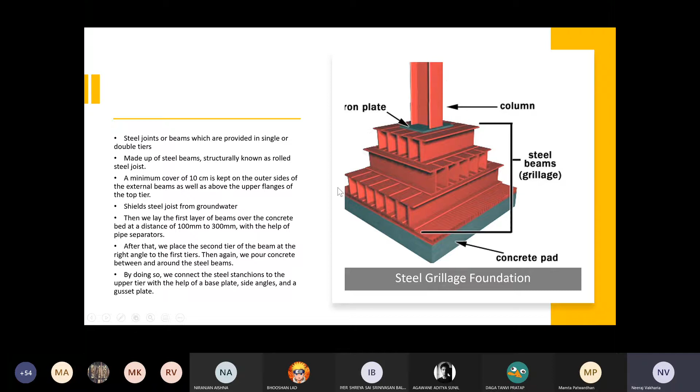There are a few advantages. First of all, the installation process is easy and fast compared to RCC. The steel used in steel grillage foundation can be reused several times, making it environment friendly. Of course, it won't be reusable for the foundation again, but the steel itself can be used later for other purposes. The technology and material used in installation and manufacturing are simple and readily available.

And customization can happen according to project requirement, size and different applications.

It assists in reducing the vibration of the house if it's near a highway or railway line. It's not rigid, so some flexibility reduces the vibration which comes to the building. It's suitable for low soil bearing capacity as well. And the foundation reduces the heat of the home; the heat which it can transfer can be reduced. Now it can be an advantage, it can be a disadvantage.

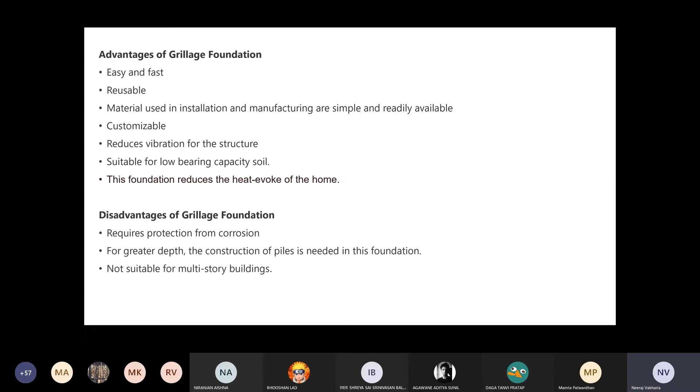In general, steel frame structure construction has four procedures. First is construction of the steel frame structure foundation, then steel column construction over the foundation, then erection of steel beams connecting to the columns, and then the floor systems used in steel frame construction. Since we are looking at the foundation, I have two reference videos which we'll see in some time.

Generally the type of foundation required for a given structure is based on soil bearing capacity, as we all know. Soil investigation, including surface and subsurface exploration, is used to assess the condition of the soil on which the steel frame structure rests. We create test pits, take soil samples, analyze the minerals, water, humidity and everything, and then we decide.

For example, when moderate to low loads are imposed, it is advisable to use an RCC bearing pad or strip foundation, and what that is, we'll see in this first video. These foundation types transfer load to soil capable of supporting the transferred loads.

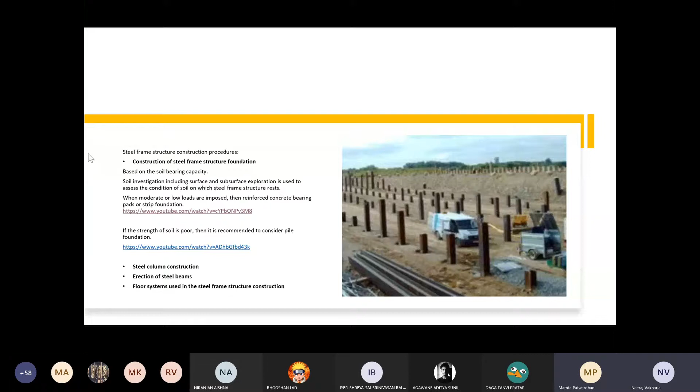Let me just open the link. I have to reshare the screen, just a second. You can post the link on chat also, Neeraj. Yeah, sure, because then it won't lag. Everyone can watch it. Primarily with modular sketching you get less marks, but this time you have to go hand sketching. That's the first link. You want us to watch it right now? I'll play it. Guys, I hope you can see the screen. Is there sound? No, I've kept it mute because it might lag.

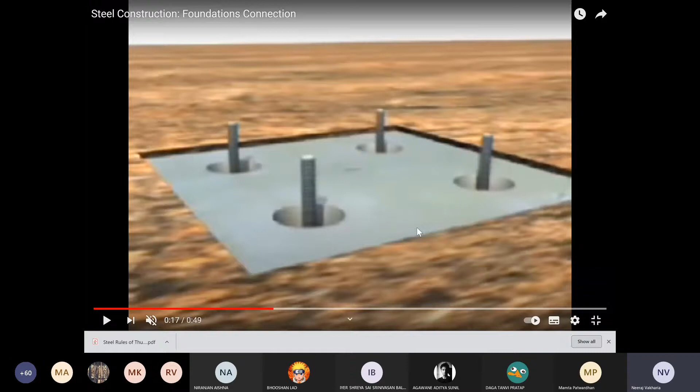Here, as you can see, below the steel structure there is an excavation pit; it's not shown here. We provide a concrete pad below. Over it, we temporarily hang these anchor bolts, then we concrete it and take it up. As I said, steel foundation is not generally used. We use concrete foundation, RCC foundation, take it above the ground and then connect steel columns to it. Here you can see there are 4 anchor bolts.

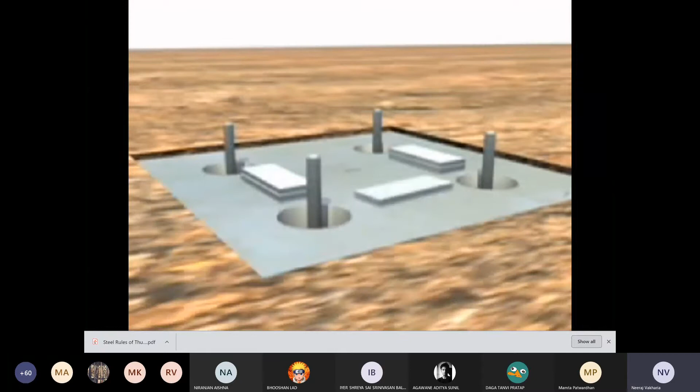There is a concrete pedestal, and these small steel plates are used to level it properly to the exact height required from all sides. It shouldn't be tilted. Then the steel column with the base plate is rested over these bolts. Then we bolt it and make it rigid. Then we pour grouting: the space between the base plate and the concrete pedestal, we fill it up with grouting. It basically makes it solid.

Was there a lag, guys? I didn't get it if some of you couldn't reply. Not really, not really.

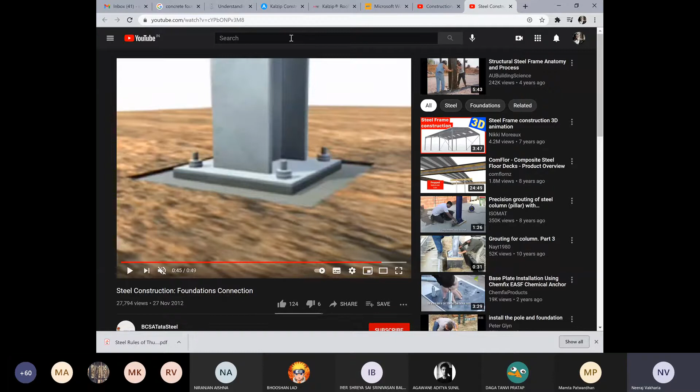Okay, great. So this is how the shallow foundation happens. Grouting is basically the filler material. In general terms, grouting is used whenever we fill up gaps or joints. It may also be used for the tiles we lay in our houses, or in conditions like this, since there was a space and we had to cover it up. So it's a liquid which becomes solid after a time.

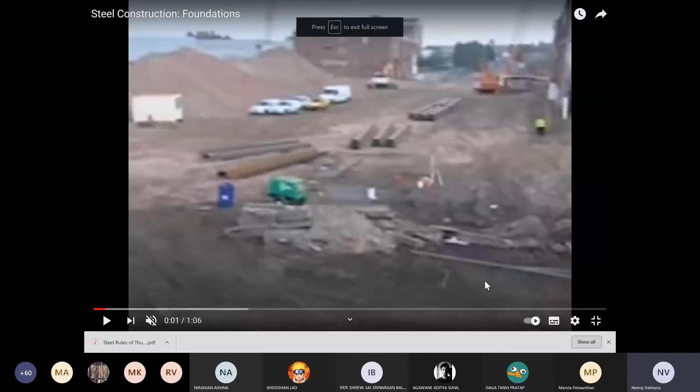Again, the material for grouting can differ based on application. Here, the grouting we use for our houses for tiles is basically cement. But for this kind of construction, they are complex chemicals which harden after it solidifies.

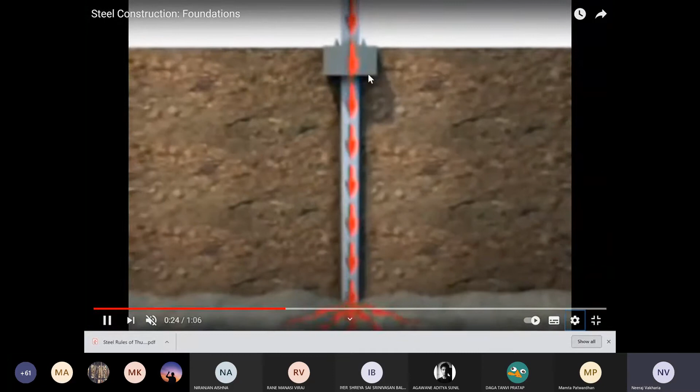So here again, we are creating a pit. Depending on the hard strata we might get, we either insert a pile, as you can see in the image, we insert a steel pile and then create concrete padding at the top. This is how we hammer down steel piles. You know about concrete piles from previous year, but this is steel pile. Again, the procedure is the same on the concrete padding. We then grout it, we bolt it, and then it's ready.

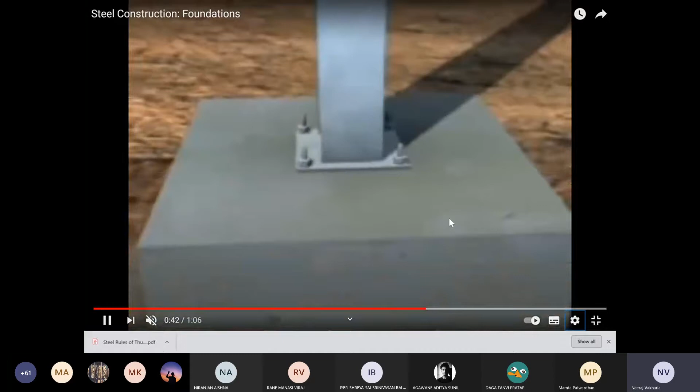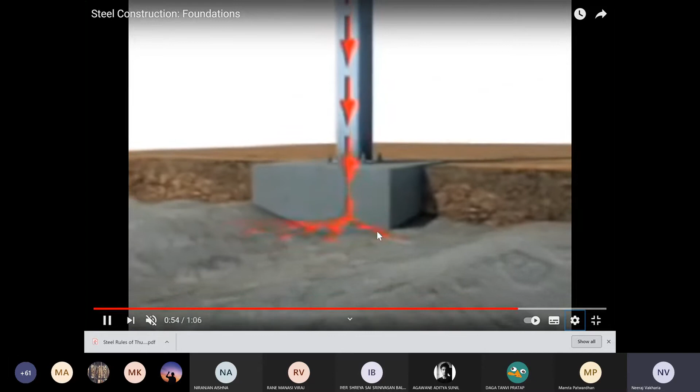So if it's going to be a shallow foundation, then just this could be the condition. But if it's a deep foundation, then the piles need to be inserted, as you saw in the previous video. It's just a very basic animation video.

See, here you can see properly. This is the steel pile. We don't usually prefer steel piles because they can corrode. But here with steel piles, there are 4 anchor bolts, then we concretize it. This, on railway stations, you all must have seen, where the bolts are taken out of the ground.

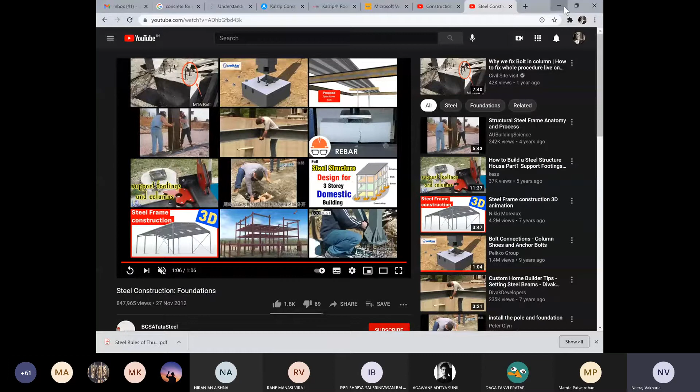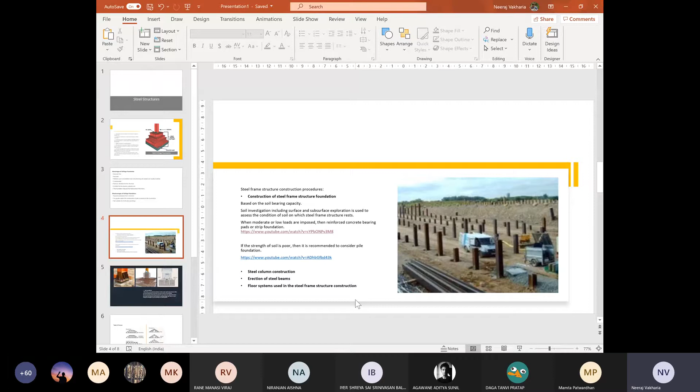Generally, even with the bolting that happens, we don't let it go below the ground level. We take it a bit above, and on railway stations, if you must have seen, they create sitting around it by creating one more concrete padding over it. So yeah, that's the basic.

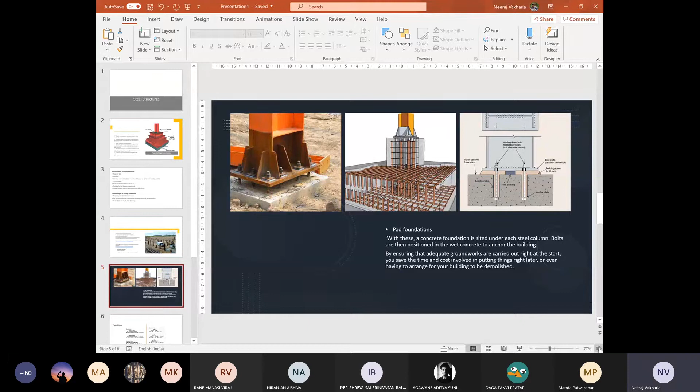See, this is the actual site image. If you can see, uh, just a second.

So here, as you can see, the concrete foundation has been created, and above that, there are 4 bolts, or 8, or however many may be required. This is how we construct it a bit above the ground and not below, so that the joinery and everything is not connected to the soil, which may or may not receive water or humidity, and we can save it from that.

So this space, the gap, is large as of now, but then we grout it and fill it up. Okay, so it becomes solid.

So the most common type of foundation for steel frame structures is the pad foundation, basically what you see in the middle image. With these, a concrete foundation is sited under each steel column. Bolts are positioned in the wet concrete to anchor the building by ensuring adequate groundworks are carried out, to save time and cost.

This yellow thing, or light orange thing, which you see is grouting, basically the bedding space. The steel packing is used for leveling, as you saw those plates which we kept. So yeah, that's pretty much it.

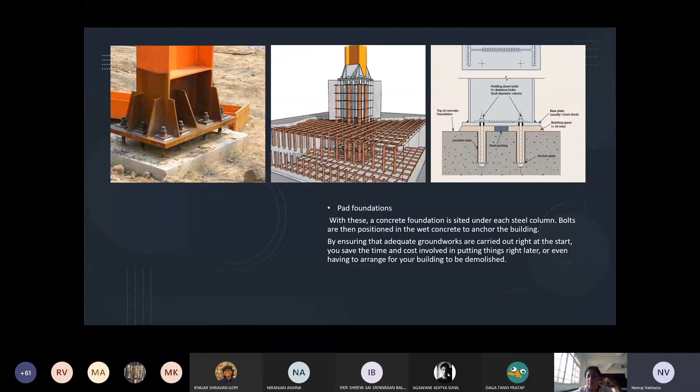Is that it, guys? Now I just have a few random slides based on the questions I've been getting for your IDS project about steel members and steel structural elements. I'm just going to go through a few of them. I wasn't able to make more slides, but one of the first things is, see,

the truss - when we say we are using steel roof or steel trusses, it's not always pitched, the triangular truss in steel. It can be any of these, and there are more customized trusses as well. If the project is huge with multiple modules, then the truss can also be created, built with the existing sections which we have. Here you can see a few images I've kept.

Mostly for structures extending - generally what we use for large spans, maybe halls or railway stations, we use Warren or Pratt truss, which are parallel chord trusses. They are parallel, not triangular. These parallel trusses we use generally up to a span of 35 to 40 meters. They are very thin. You don't have to every time create a triangular truss - that's not the limitation, you can do anything. Just keep that in mind.

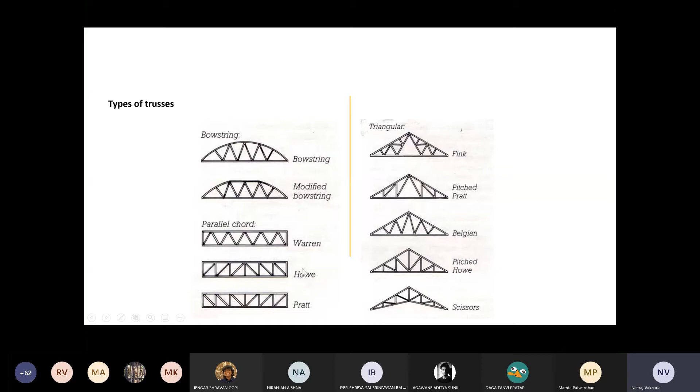Then, composite floor slab. Many of you are asking how the slab is constructed - steel slab is constructed in steel structures. So that again is a small video I'll be playing. Just give me a second.

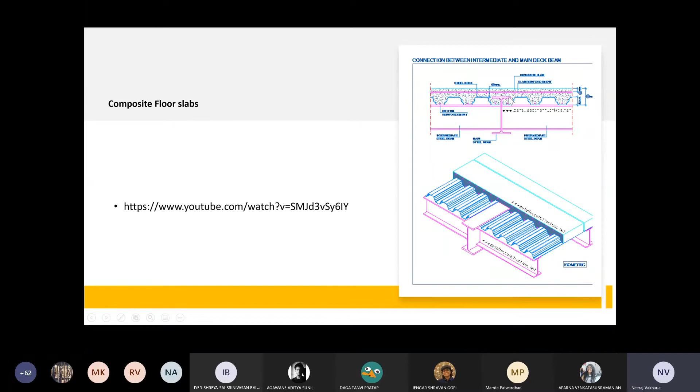But it's not like what we use for temporary shading. It's expensive, it's better.

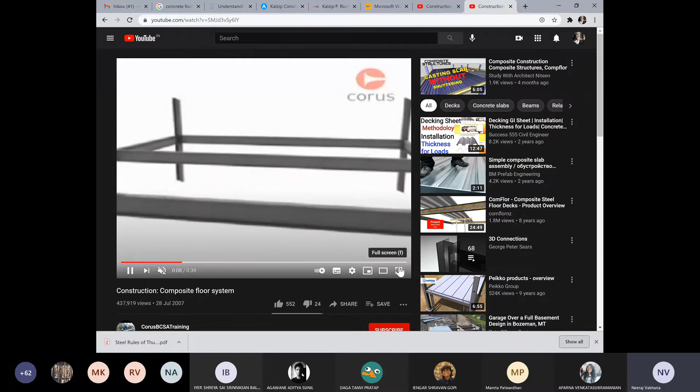As you can see in the video, this beam, over that we provide metal decking. Then you can see the video, right?

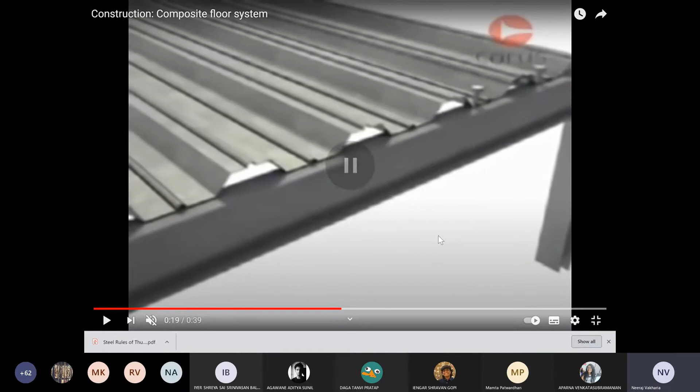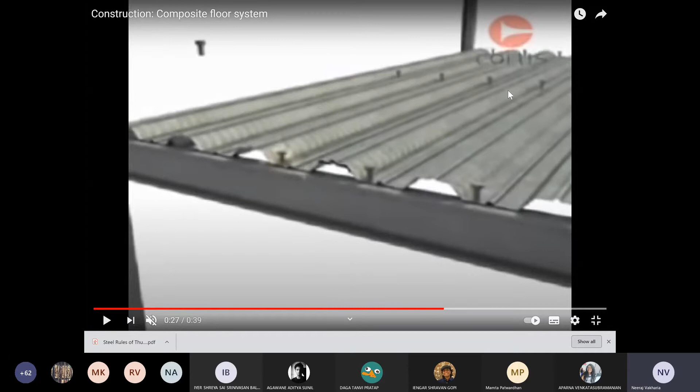Yes, okay. As you can see, it is bolted with the I-section below, so it's fixed at intervals. As the span might be large, then here again we might give one more I-beam, and over that we again fix it.

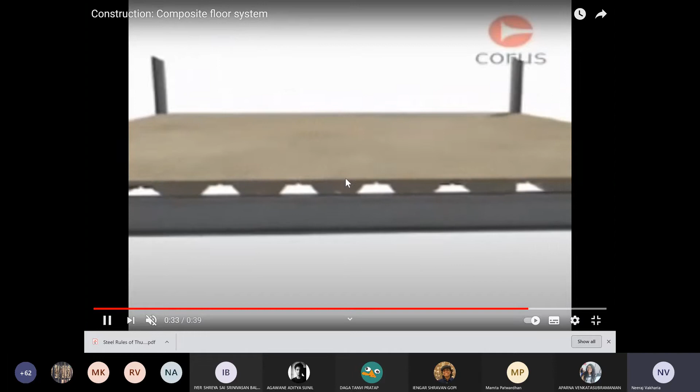Then we provide reinforcement if required - generally basic at least. And then we cover it up with concrete, and that's how these slabs are created. So that's basically metal decking, and that's how this composite floor slab works.

Someone is asking a question: does the depth of foundation vary if comparing RCC foundation and steel foundation, like for tender? Yeah, it will vary according to the material. The depth of foundation may depend on a few other aspects as well, but if we compare RCC foundation and steel foundation, yes, it does vary.

So is it like steel foundation requires less depth? Steel requires less depth because its capacity to bear the soil pressure is better. I mean, it's this area. Okay, so it does vary. So this is about the composite.

We don't call it steel slabs because we are using concrete RCC, I mean concrete and steel decking. So it's composite floor slab.

The last thing I want to tell you, this might be important for all of you for your IDS project. This is for the structural steel member - these are thumb rules which can be used for sizes, just to give you an idea so that you can visualize in your mind how the sizes of these members will differ, or how you can decide it.

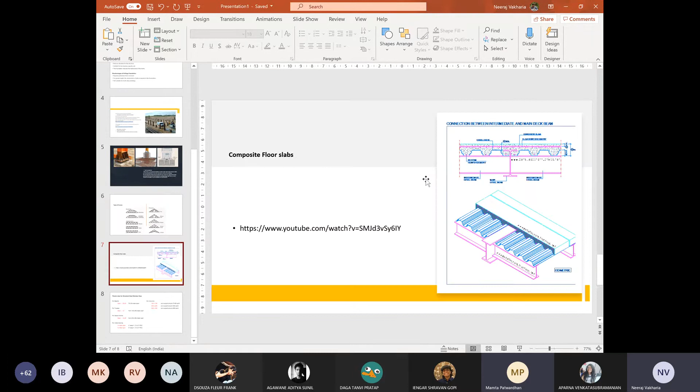So, anyone else have any question? Yeah, Neeraj, I had a doubt. Go ahead. Thank you. So this formula for trusses, can it be used for trusses that span around 6 meters, like a king post truss? Sorry, your voice is breaking, there's a disturbance. For 6 meters what? Can this formula be used for trusses that span less than 10, like 6 meter or 5 meter spans, or should we not use trusses in such short spans?

In such a condition, you shouldn't use a truss. I mean, you don't require it unless you require it for the structural form. If you want that design and that kind of structure, then it's fine. But structurally, the truss is not required for that condition. And even if it is, then we don't use this kind of truss. What we do, I'll just share my whiteboard.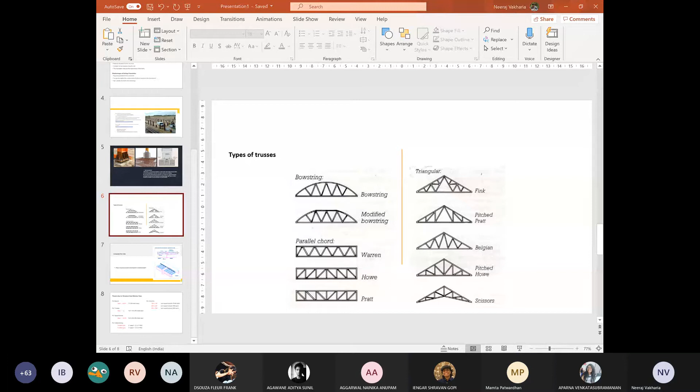Sorry. Again. Okay. So, can you see my screen?

Yes. So, for that kind of thing, we don't use a truss this way. What we generally do is connect sleeker members like this, the parallel chord truss which we saw, connected this way. And then we connect these two members at the center, and then connect it to the columns. I won't be able to show you the detail here, but this is how we do it. We don't have to use the bracing for it, for 6 meters, I'm saying. Even a steel joist would suffice.

Someone is not able to see the screen. I can see the whiteboard, but I can't see any drawing on it. But I could see the drawing. Okay, great. So maybe it's the internet connection.

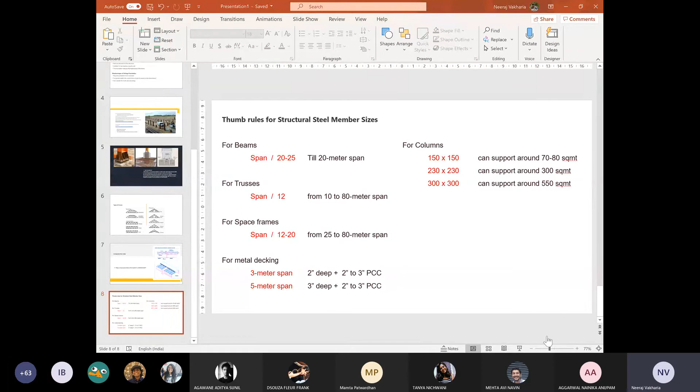Just a second. Neeraj, hello. Yeah, could you explain the column size again? I mean, what do you exactly mean it can span for 300 square meters like that? Okay, I'll explain. So, okay, I'll again share the screen. Just a second.

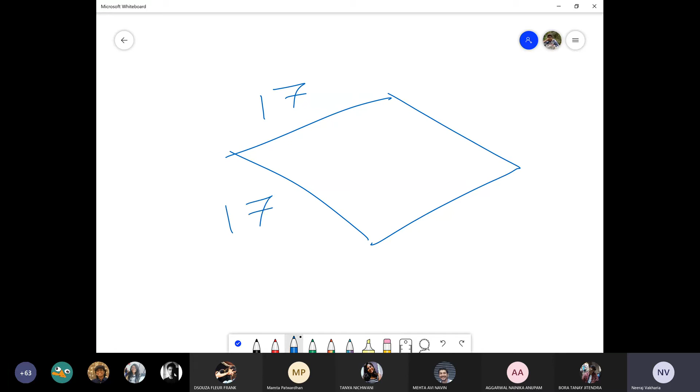350. Okay. I hope this whiteboard you can see. I'm using the app in my tab. So when I say that the 230 by 230 column can support 300 square meter, basically, if this area is of 300 square meter, can someone tell me the square root of 300? 14. Okay, 17. Let's say 17. 17 by 17. If this is the span, I mean, not the span, sorry. Just a second.

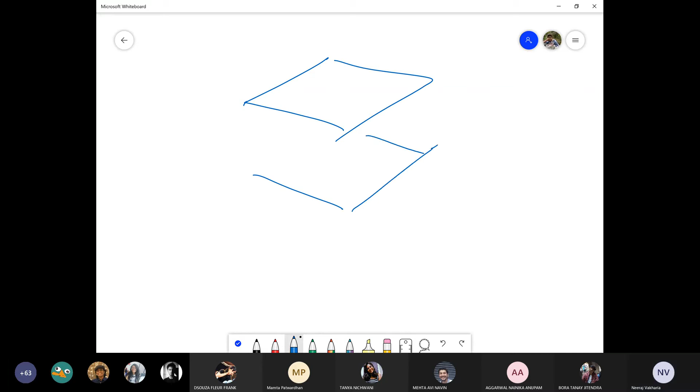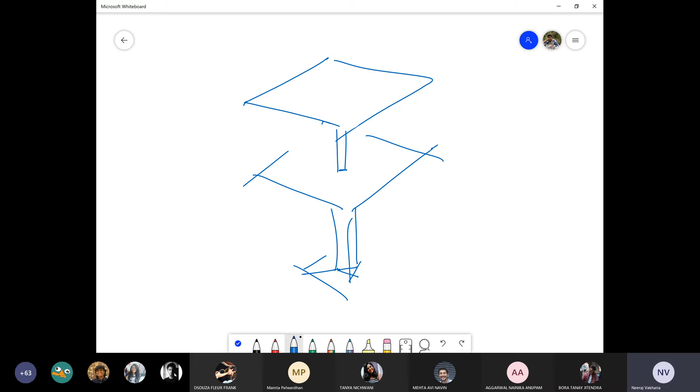Okay, so let's say you have ground floor plus first floor slab and second floor slab. If this is the condition, and you have a column which is supporting. Here one story column will come, which is again connected at the bottom to the foundation. So this column, this is foundation.

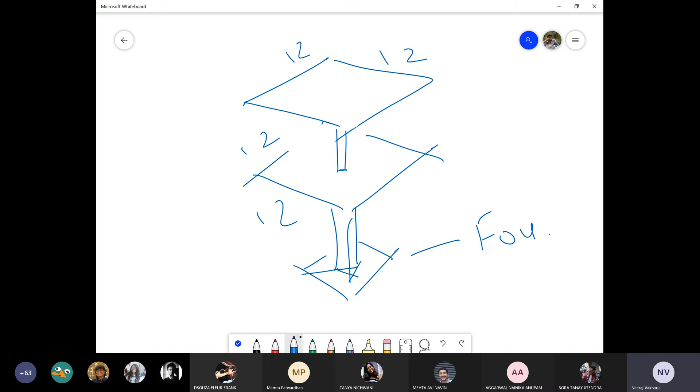So let's say this area is 12 by 12, a 12 by 12 slab. So this area is 144 square meter. This area can also be 144 square meter. So total is going around 280, 290, 300. So as I said, a 230 by 230 column can carry 300 square meter of load. This is how you can imagine your sizes to be. This single column can support this many floors' load. I hope you got it. This is just to give you an imagination of the strength of a steel column.

So if you are going 3-story and there is one more slab, you can take 100, 100, 100. So basically 10 by 10, 10 by 10, 10 by 10, so around 300 in total. Again, don't stick to the number, just understand how much it can span. From the column it can span 6 meter here, 6 meter here. So if you have 4 columns, you can maybe span 15 by 15 meter easily by 4 columns of that same size. It's just visualizing your structure.

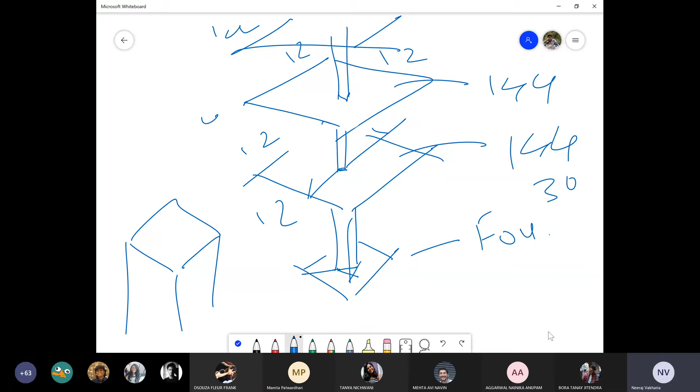Generally for columns, that's why we don't give thumb rules, because it's difficult to imagine. So if you have a multi-story like 4 or 5 story, you can go with a 300 by 300 column. If you have ground plus 1 or 2, you can go by 230 by 230, 240 by 240. And again, don't draw this kind of column as a rectangle column. That's why I'll be showing you the steel table of what kind of compression members we have, so you should refer to those. Just let me open that file.

Hi Neeraj, I had a question. If you're working with an accessible roof that has a flat steel truss, the load is more than just the roofing material. So does that change the structure, in which you have to consider the truss as well? Yeah, it does. But if you are going to use it for maintenance work, then it's fine not to consider it.

Even if we are designing it just for the wind load and self load of the roof itself, it can still easily take 50 people at a time on your roof and nothing will happen structurally. But if you're going to use it with a classroom, an office, or machines on top, then the truss configuration will change. And I'm sure you won't be using a sloping or triangular truss for it because you want to use the top space.

So if you're using it as a terrace or for maintenance work या कुछ cleaning करने के लिए, वो सब, that's fine. If you don't consider it, it's fine. But if it's a fully accessible roof, like in my case, I have an amphitheater on the roof. So in that case, how will it change the configuration? What changes will you have to make in the truss?

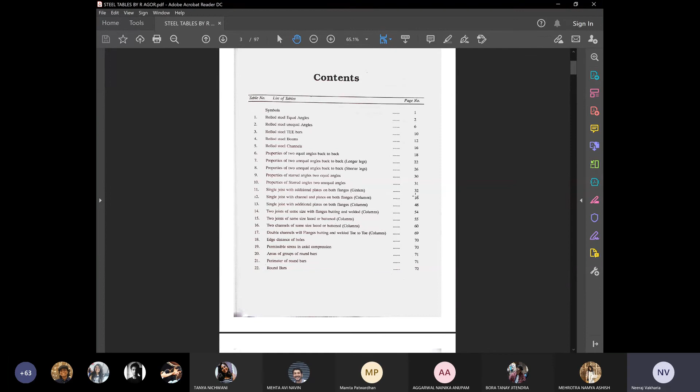So this is the last thing which I want to show you. This book has all the standard sizes of all the members. It also has all types of configurations, shapes, and loads. So here, rolled steel, equal angles, C channels, then beams. Then again it gives the information on girders, columns, whatever you want to use. I'll just take you to one of the pictures.

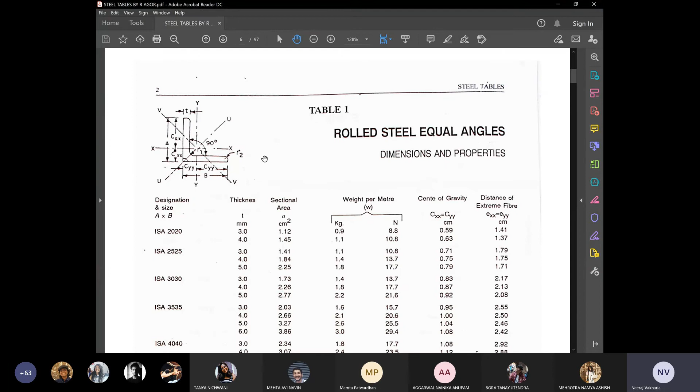So basically these are just regular angles. You might have seen these in temporary work around you somewhere, maybe for a roof or anything. Here they give all the details in the steel table: the thickness, all the standards. So when you say ISA 2020, it means the A and B dimensions are 20. The letters on the left tell you the shape, like Indian standard angle, and right side में जो भी digits होते हैं, that's the dimension.

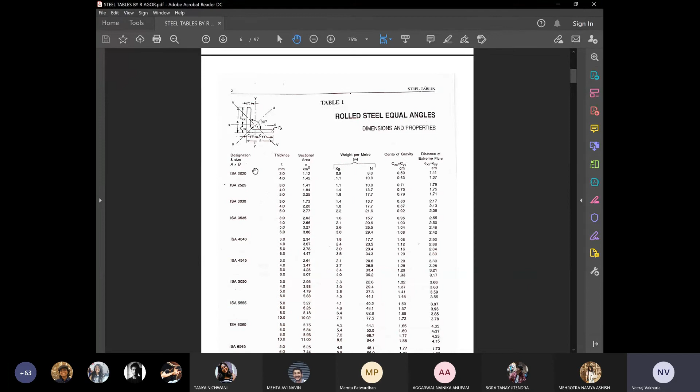So for all the different dimensions, and here it's thickness. All the tables will have different properties mentioned, maybe weight per meter, 1 meter ये section का weight कितना होता है, center of gravity. All these will be used for your third year numericals. अभी इतना load लेने की जरूरत नहीं है, but it would be better if you use sections based on these standard sizes. You can't take a 22 by 22 mm angle. You have to use these sections.

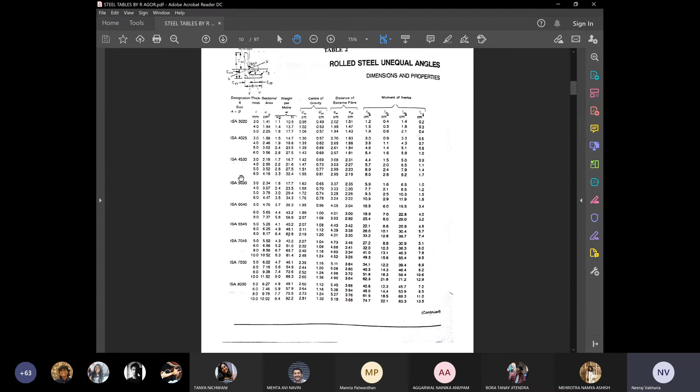So again, these are equal angles. These are unequal angles. Then these are angle sections. Then these are T sections. Here again the sizes and all the details will be mentioned. So at least what we are expecting is not to use any size you want.

For example, even when I said कि 150 by 150 का column, that doesn't mean कि पूरा block MS का solid column रहेगा. Basically it's a configuration of column which fits in that size. There is a column table also.

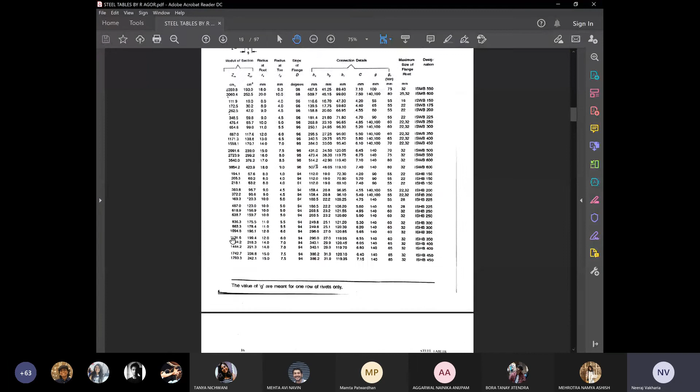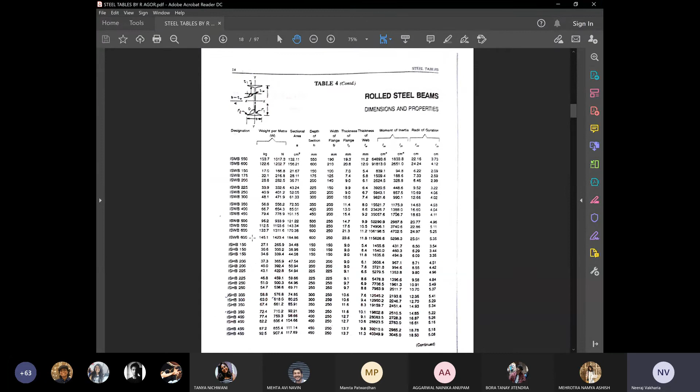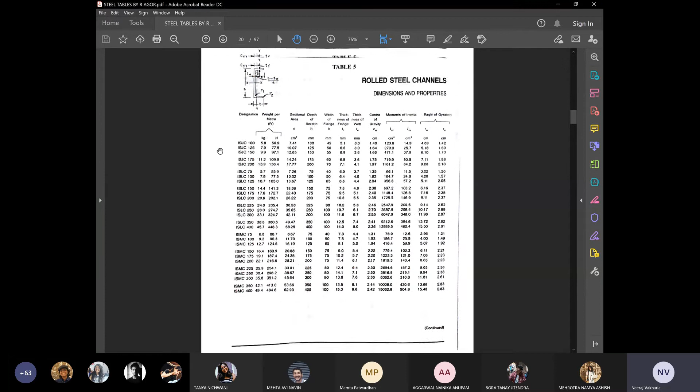These are beams. So when we say कि structural depth 500 या 400 या 200 का beam you have to take, you have to see here कि उस depth का कौन सा beam है, and accordingly use that standard size. It's better if you show these standards and understand these standard sizes. These are again rolled steel channels, C channels. Okay.

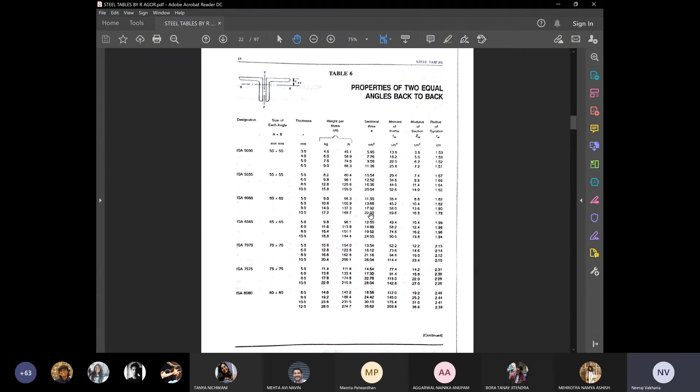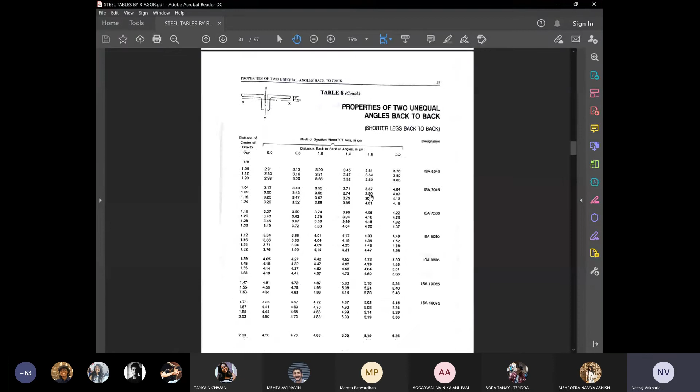So every time we don't have to calculate and go through everything, how much load it can take and what will be the strength of it and all those things. We don't have to calculate. We just have to refer this steel table. So here again, equal angle. There are various configurations by which it can work. So that's the whole thing.

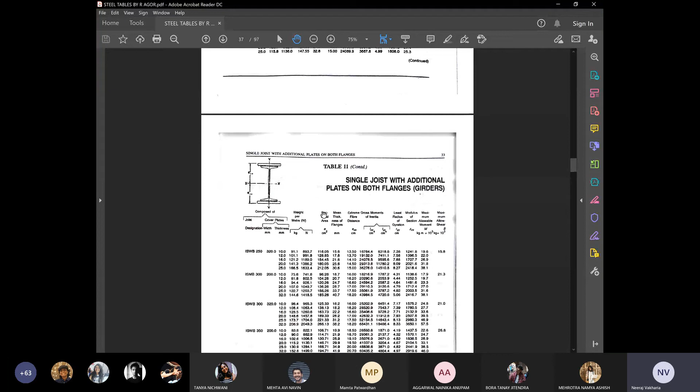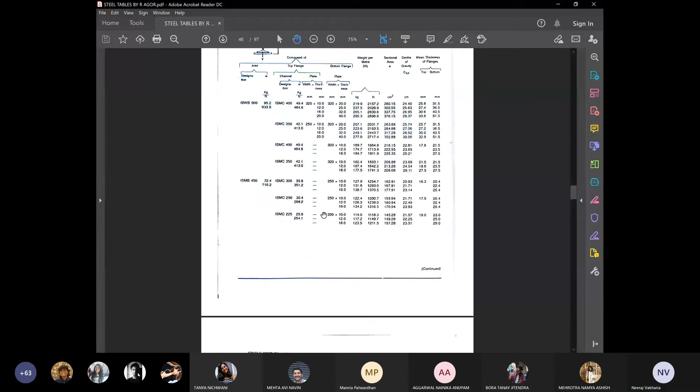Okay, here we have what will happen if I section is used with additional plates on the sides. If you want the cross section of steel to be more, then this configuration can be used. So basically that's all what it is in a steel table. I'm just trying to see where the column sizes are.

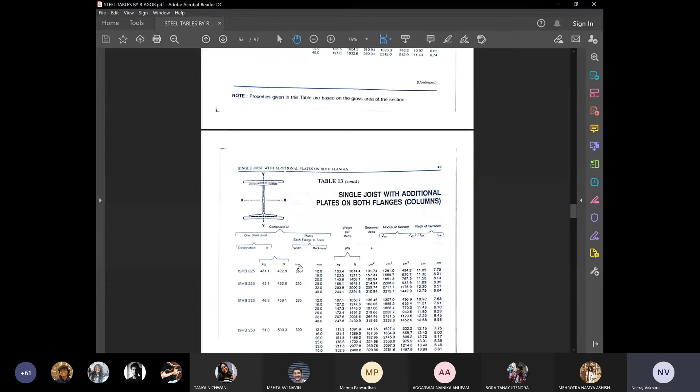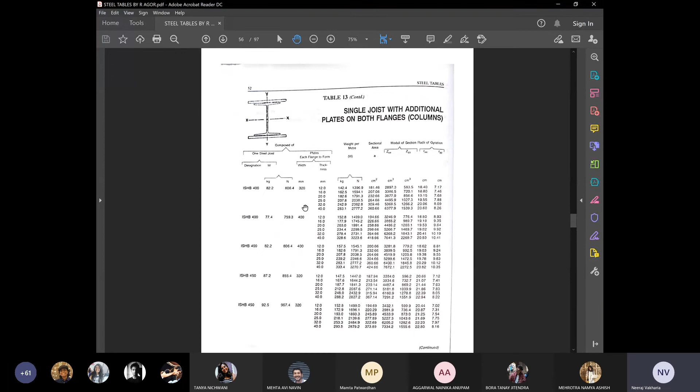Yeah, thanks, Neeraj. That was wonderful. Because I think now they've reached the resolution stage in their IDS, and this was much required for them. So a lot of their concepts must have got cleared. So that was very good. Any other questions? Anyone? Something's on the chat.

What is this connection called? The connection that connects the suspended pathway to the bottom of the beam. This is suspended connection, I guess. It is suspended via cables, right? It's hanging from top. Yes. So suspended connection. See, by the typology, I don't think we have one. There might be, but generally, how we can differentiate the connection is, as Mamta must have taken the lecture, moment and rigid connection. That way we can differentiate, or by the type of it.

So basically, this is in Broadway. This is suspended connection, because here cables are connected to the beams or the girders for the pathway. That's how it might be connected. Sorry, I wanted to know how that cable is connected to the truss. Like, what is the fixed end connection? The names I found online were a spelter socket connection. So the detail of it might vary from project to project, from engineer to engineer. But the basic idea is that

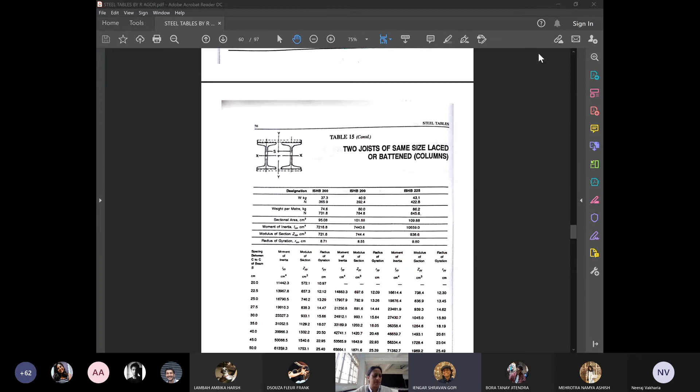Yeah, I've sent a sketch in the chat. Will you be able to open it? Yeah, I can see. So I've got this 10-meter roof span. It's a sloping roof, and I'm supporting it with a truss. And I'll have columns for my walls placed 2 meters in on one side and 4 meters in on the other side. So will I need an I-beam where I've marked A to help support the truss onto the columns, or, if it's the strength of the truss, can I just directly fit the truss onto the column?

Truss configuration is not required for 10 meters, but if you want a sloping roof and all, you can use it. But an I-girder will also suffice for this span. So I just want a truss to slope the roof. So for that I'm putting the truss in. So do I need a truss and an I-girder or just a truss? No, just the truss. Why use both? No need for an I-girder, right?

Okay, perfect. And the truss thickness will be roughly how much for a 10-meter span? Because I saw the truss in section in one of the books, a Tata book I saw in the library which had a 9.4 meter span truss, but it didn't show any thicknesses. For span, I told you how to decide the depth. The thumb rule I gave you, span by 12 or something. So you can follow that. So the thickness also will be in the same sense, right? The main thickness would be the same, and then whatever kind of truss you can use. Then the depth will follow your thumb rule.